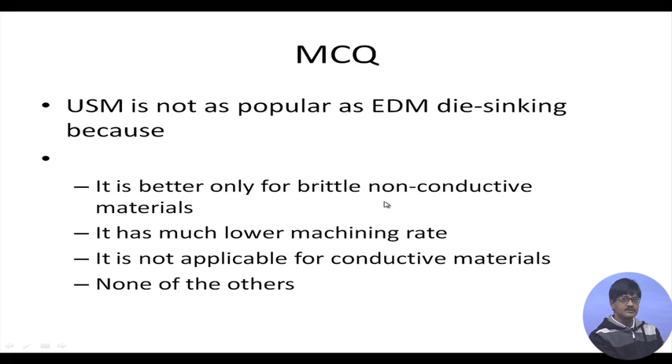Next, it has much lower machining rate. So the first one is correct. It has much lower machining rate, this is also correct. The main problem in USM is we are not satisfied with the machining rate in most cases.

It is not applicable for conductive materials. Is USM not as popular as EDM because it is not applicable for conductive materials? The statement is not correct. It is applicable for conductive materials, but it is generally not applied. First, if the conductive material is ductile, then USM material removal rate will not be as high, and secondly, if it is conductive, then why not go for EDM?

Why not go for EDM? So, it is not applicable for conductive materials is not correct. It is not carried out for conductive materials mainly because EDM is the better choice, the first choice. None of the others naturally is wrong. So the first and second are both correct here.

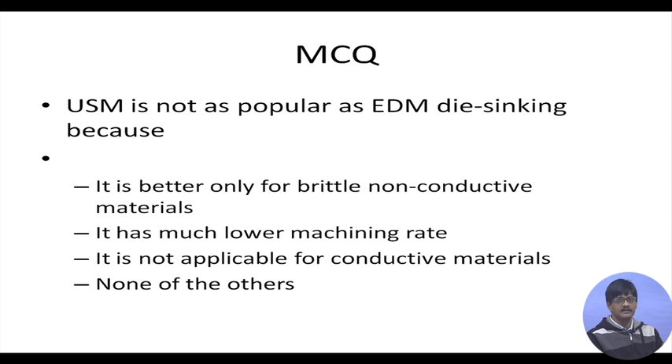This means the whole acoustic head is moving downwards at a constant rate due to its connection with the motor. So unlike the case where we apply a constant load, here we are working with a constant rate of feed. This is not very much used in ultrasonic machines, because they generally work on constant load, since if I use a constant rate, the machine might not be able to remove material at that rate, and jamming will occur.

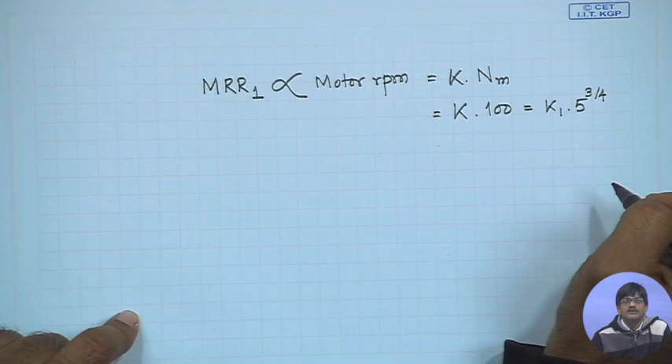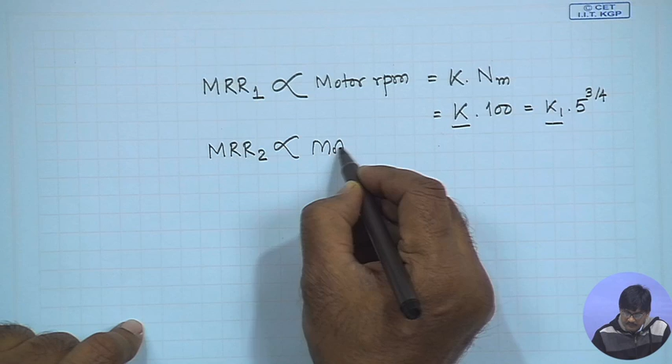So immediately we are getting a relation between k and k1. In the second case, what is happening? MRR2 is proportional to the motor RPM, therefore it must be equal to k into 360, equal to k1 into f to the power 3/4. We do not know the value of f.

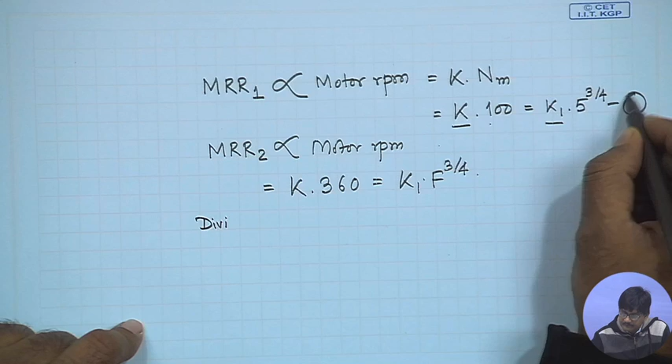So let us see whether we can relate f to the previous equation. Let us divide this one by this one. So we have 100 dividing by the second equation, what do we get? We will get 100 divided by 360 equal to, what is above? k1, k, etc., everything will cancel, leaving 5 to the power 3/4 divided by f to the power 3/4.

And therefore, we can say f to the power 3/4 must be equal to 5 to the power 3/4 into 360 divided by 100. This is a pure number, you can solve it, and I have solved it and found it to be 27.

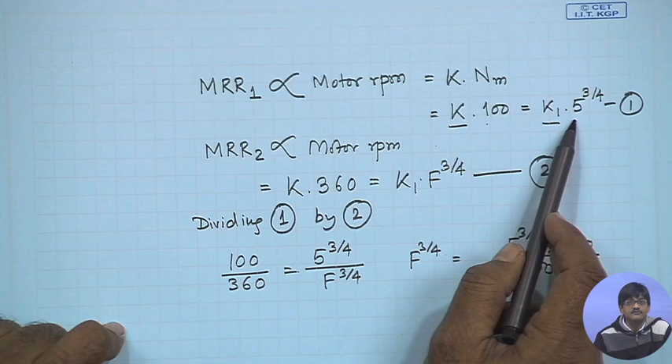So let us quickly go through the logic once again. If I am saying MRR is proportional to motor RPM, because it is working without jamming, I can relate MRR to motor RPM. Secondly, since this is the rate of material removal, I know it must be proportional to the static load. So in the first case, static load has been given, so I relate this to k1 into 5 to the power 3/4. Next time, when RPM is given but force is not given, I can still consider force to be F, and therefore I have the same relation existing between MRR, motor RPM, and static load.

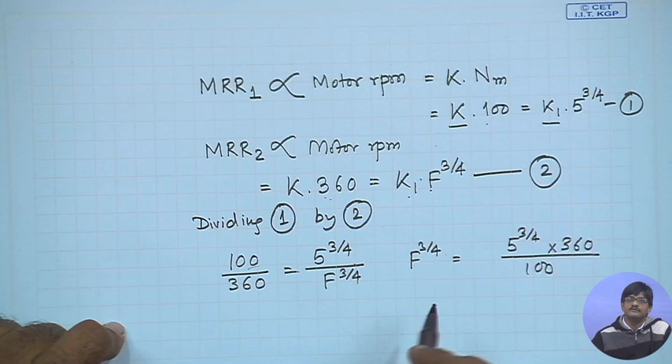Then I divide equation 1 by equation 2 and I get this relation, and f to the power 3/4 comes out to be this value. I can solve very easily for this - if you have just a calculator in hand, find out what's this. F is equal to all this to the power 4/3, and that way your result will come. It comes out to be 27. So we must be having D to be correct. D, 27, is correct.

So let us move on to the next problem.

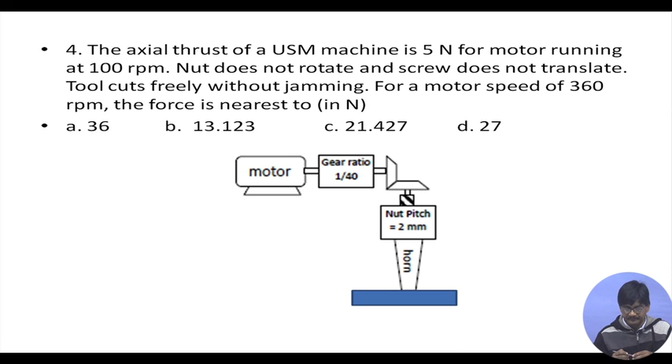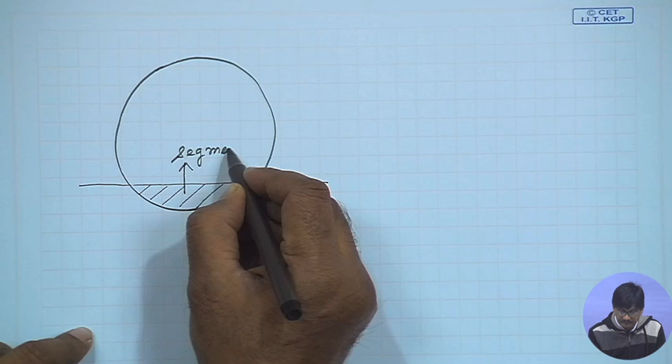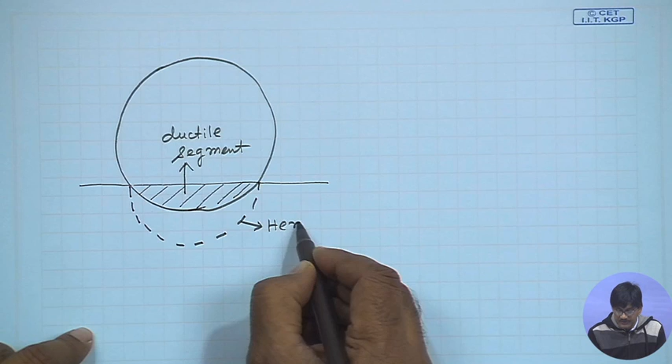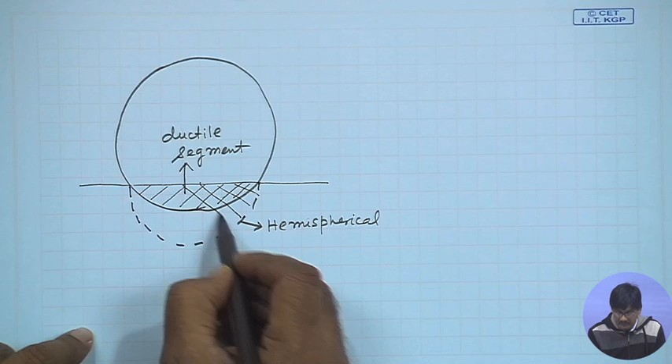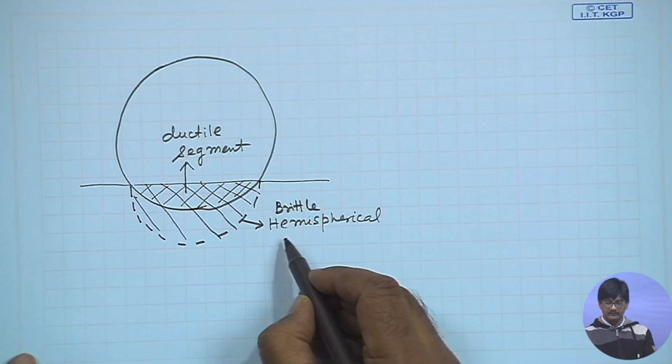But in case of brittle material, this is the hemispherical chunk which is removed. Hemispherical, that means the full thing. Let me use another type of hatching. This whole material, so this is brittle. This one is removed if you have brittle material.

So, just notice this: if the hardness of the workpiece increases, there is a possibility that in some cases it might be shifting from the ductile regime to the brittle regime. As we know, if hardness increases, it has a correlation with brittleness. Harder materials are frequently more brittle.

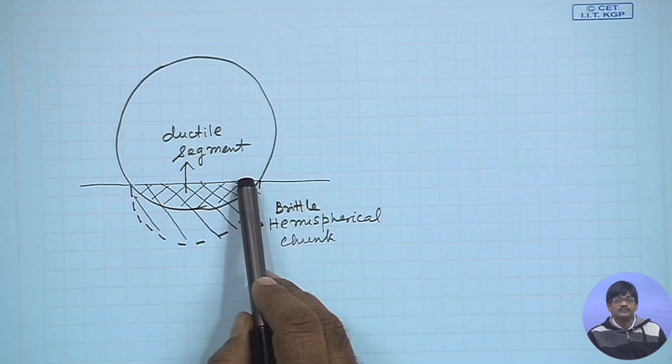So, if the hardness of the workpiece increases, there is a possibility that it shifts from the ductile regime to the brittle regime, and therefore, suddenly, instead of this material getting removed, now a larger chunk will start getting removed and the MRR will rise.

So, coming back to the option, we will find the third case is also correct in certain cases. The second case is correct and the third case is also possibly correct in certain cases. So, here both the second one and the third one are correct.

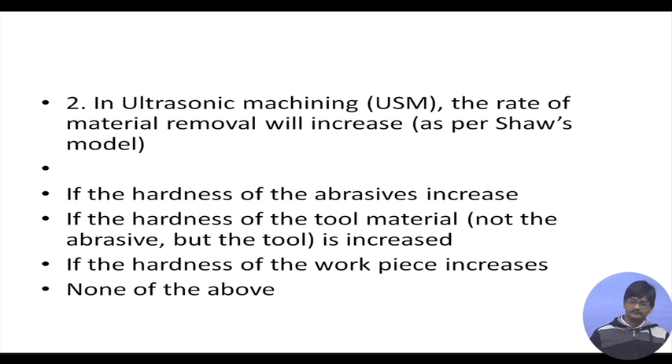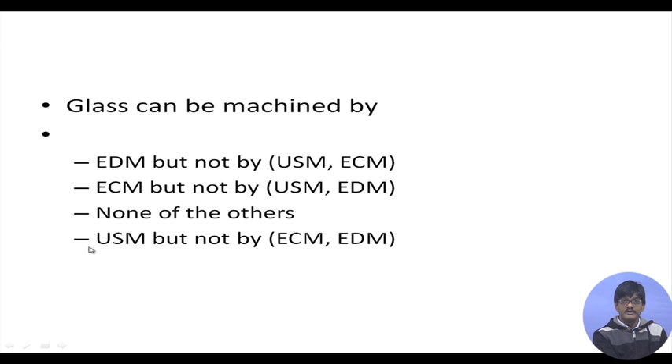I will just read out the options: EDM but not by USM or ECM; ECM but not by USM and EDM; and USM but not by ECM or EDM. The fourth one is correct.

In case of ultrasonic machining, amplitude of vibration is increased by using ceramic tools instead of metallic tools. Mind you, tools means the one which is stuck at the end of the horn. This is not correct; there should not be any effect from using a different material tool.

Second one, using larger abrasive particles. Larger abrasive particles have nothing to do with the amplitude of vibration.

Using special shape of horn, this is correct. If you use an exponential horn, any type of tapered horn, or a stepped horn with the final step and tool end smaller than the larger cross section at the acoustic head end, you will have amplification in the amplitude of vibration.

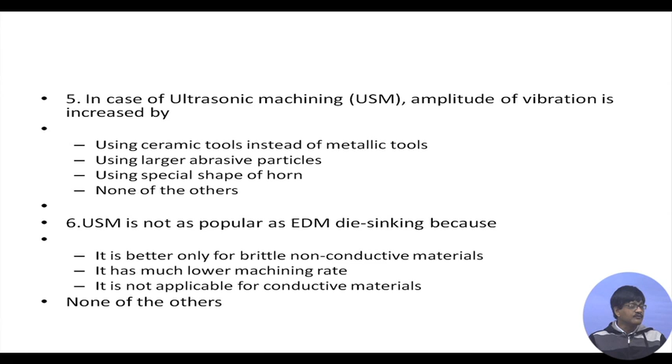So the answer is using special shape of horn. Next, USM is not popular, as I think we did before. Okay, I am skipping this.

The difference between abrasive machining and LBM (laser beam machining) is that LBM occurs by mechanical action, while abrasive machining occurs by thermal action. Actually, it is just the opposite. LBM means a laser is focused on the workpiece surface, and due to its high energy density, it can heat, melt, and sometimes evaporate material so as to cause material removal. So it is basically a thermal process, though initially the laser beam consists of energy in the form of light. So the first option is not correct; it is just the opposite.

Remote machining is possible in case of LBM. This is correct. You can weld or cut a material without contacting it by any physical device if you are using laser beam machining. So the second point is correct.

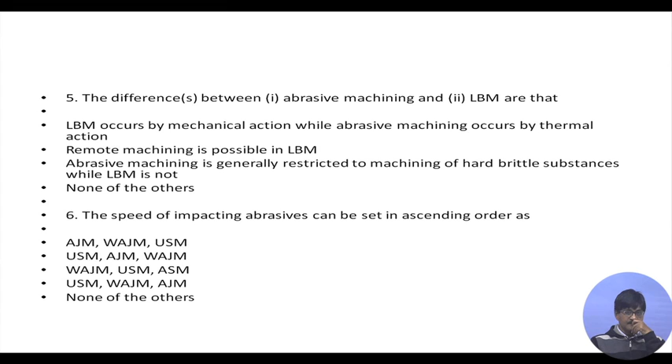Speed of abrasive grits in different processes: in ultrasonic machining, the maximum speed attained by the vibrating tool is of the order of 10 meters per second. How do we find it out? We have done it once to find the velocity of free impact particles in ultrasonic machining, and it was equal to twice pi frequency into amplitude, 2 pi f a. If you put in values, 2 pi f, say f equal to 20,000, and a equal to say 50 microns, you will quickly find a value and you can check this out.

Then abrasive jet machining - abrasive jet machining typically works in the range of 100 to 300 meters per second. What does this mean? This means abrasive jet machining carries the abrasives in a gaseous medium. So if there is a gaseous medium, first some particles are put into the gaseous medium which is at high speed, and it accelerates the abrasive grits to a particular velocity, and in the process it loses some of its momentum, and ultimately we get some speed within this particular range.

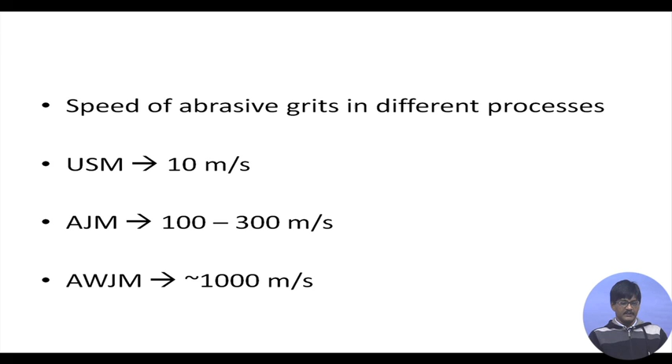Last of all, let us quickly go through the preliminaries of solving a problem which I had set before you for solution. I hope you have tried it yourself. Let us have a quick look at how it can be attempted. The problem was this: you are doing a die sinking operation on a particular job, and machining was to be done up to 5 millimeters, but the customer suddenly changes it and says I want 7 millimeters depth, but does not give you extra time for this. So naturally you have to use a different set of input factors in order to get a higher machining rate. And what are those input factors which you are free to change?

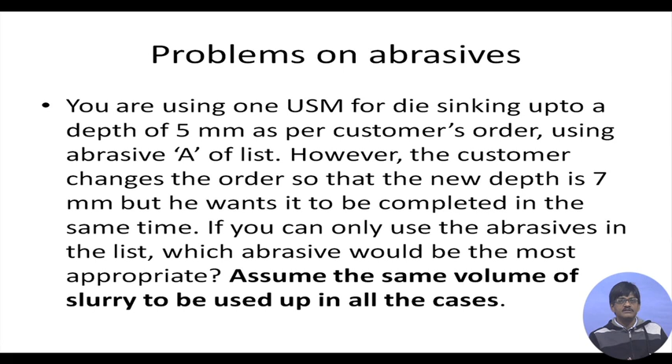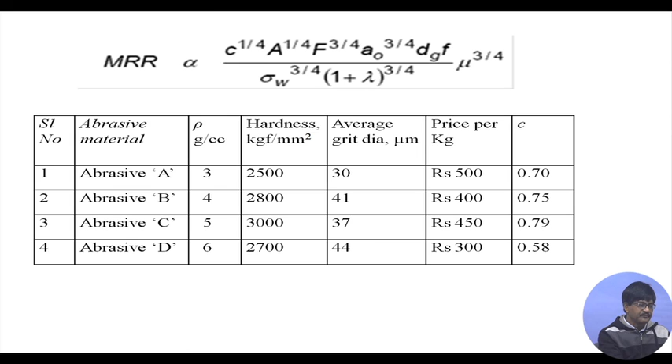They are first of all given by this table - you are using abrasive A and you can use abrasive B, C or D. Which one would you choose? What are the things which are different for the abrasives? The abrasive grit diameter is different, the recommended abrasive concentration is different, the abrasive densities are different, and of course the abrasive prices are different. So I had given you roughly a procedure by which you can solve it, and let us at least do the preliminary part to find out what exactly is focused upon in this particular work. So for that, this is the way we were supposed to do it.

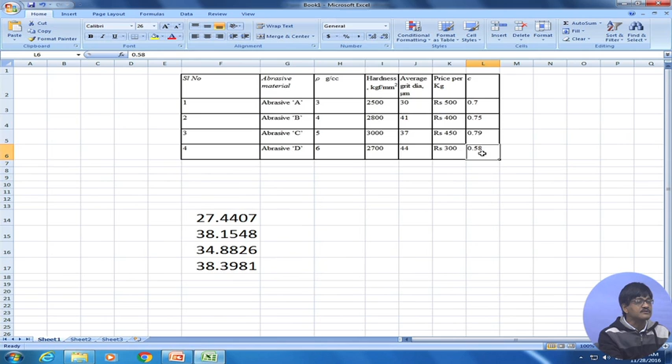So, what I will do is I will end the show and quickly go to the way of solution. This is the place where I have kept the values of the abrasive grits. Let me make it slightly larger so that it will be easier for you to see. Yes, this is good enough.

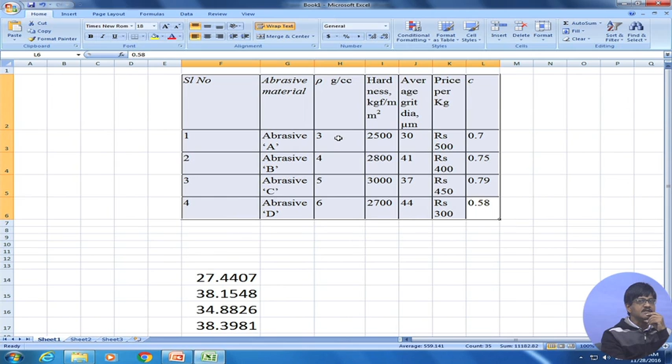So, first of all, when we are trying to find out the rate of machining these abrasives would produce, the first one must be proportional to J3, that means the average grit size, which is 30 microns diameter multiplied by C to the power 1/4, and C happens to be 0.7. So that way, this value is being chosen for the first case, and it is 27.4407. So this is its MRR will be proportional to this.

So in the other cases also I have found out corresponding terms to which the MRR will be proportional, which is simply grit size into concentration to the power 1/4, and it is this list that we are obtaining.

Let us quickly find out whether they have a ratio roughly equal to 7:5 or not. That means the material removal rates in these cases should be, the one which is appropriate, should be having 7:5 material removal rate ratio.

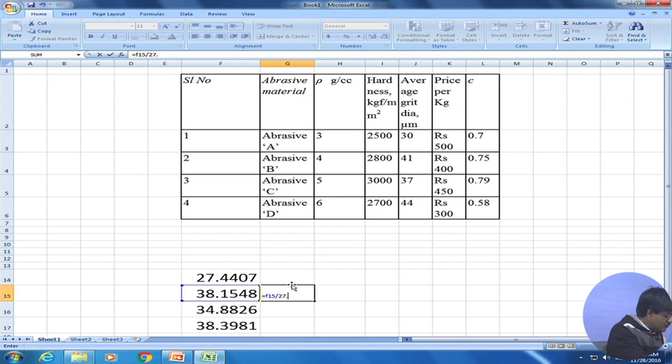So let us take how much will this be? This is equal to, let us try F15 by F14. So F15 by 27.4407. So it is equal to 1.39.

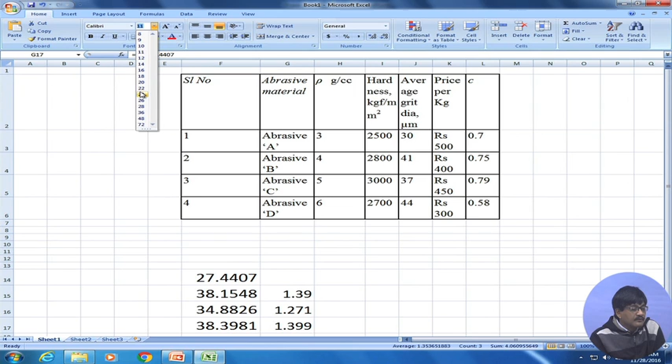Okay, let us see the others. Let us increase the size a bit. How much? That is right.

See, these are the values that we are obtaining as the ratio of MRRs to the original MRR obtained in case of abrasive A. These ratios show that it is roughly equal to 1.4 in this case as well as this case. Once again, to check what is this value, this is equal to F15 divided by 27.4407, which is this one. That means the ratio of the MRRs in these two cases.

So in this case and in this case, it qualifies technically. The technical specifications are such that it will give us the MRR that is required. But in these two cases, which one should I choose? Should I choose abrasive B or should I choose abrasive D? For that, we have to take a decision as per the economy that those processes offer. What do you mean by this?

I mean that the price per kg now has to be taken into consideration. In what way? We will say that from the concentration, we will find out the amount of abrasive which is being used, and we will make an assumption here, that the same amount of slurry volume is used in all cases. So if it is 1 liter in case of this one, 0.75 means that 750 cc's of abrasive B have been used here.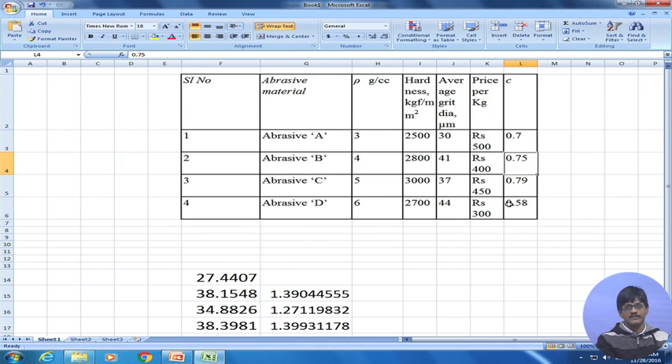That means technical specifications and price requirements make it the best possible abrasive, and we did that and found that abrasive D was the best. So the last part I leave it to you, I am sure you can solve it. Okay, so with that we come to the end of the 10th lecture. Thank you very much.